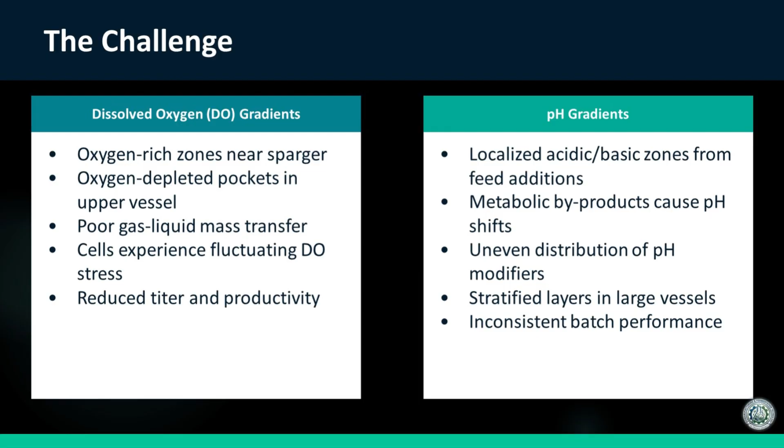You spent months in the lab. You have this absolutely perfect process. Your little 2-liter glass vessel is just humming. The cells are happy. The titer, the amount of product you're making, is just through the roof. Popping the champagne? Exactly, you pop the champagne. You tell management, hey, we are ready. And then you move to the manufacturing floor. You dump that beautiful process into a 5,000 or 10,000 liter tank, and suddenly the biology just revolts.

Productivity drops, the yield is completely all over the place, and you're just left standing there trying to explain why the sure thing isn't working anymore. It's the classic scale-up paradox. It really is the monster under the bed for fermentation scientists. And usually the explanation is just a shrug and a sigh that basically says, well, physics is hard. Which, to be fair, physics is hard.

Very hard. But today we're diving into a stack of sources that claim we don't actually have to just accept this as some law of nature. We are looking at a really specific solution kit. And it's designed to be fast, right? Super fast, designed to be implemented in a sprint, literally 7 to 10 days to fix this. Which is wild, because 7 days in this industry, you blink and a week goes by. Usually process changes take months.

Right, totally. So the mission here is really specific. It's eliminating gradients. We're talking about dissolved oxygen, DO, and pH, the big two. The goal is total homogeneity, making sure that the cell at the very bottom of a 2-story tall tank is experiencing the exact same spa day as the cell at the very top. Which really is the holy grail, because when you're dealing with 10,000 liters of fluid, you're dealing with massive hydrostatic pressure. You've got slow mixing times, gas transfer issues. It is definitely not just a bigger beaker.

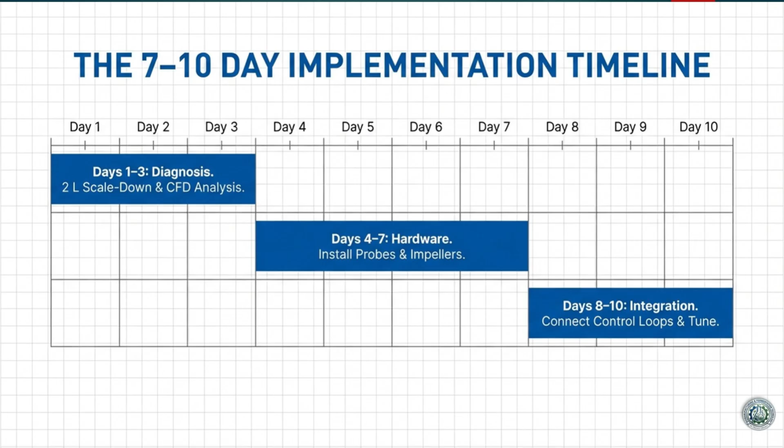This is where we close the loop. The hardware gives you the potential for homogeneity, but the software ensures you actually maintain it. And the sources detail two specific strategies here: DO-stat exponential feed and pH cascade control. Let's take those one by one.

Sure. DO-stat exponential feed. That sounds a little complicated. It's actually quite elegant once you see it in action. In a fed-batch culture, you're constantly feeding the cells glucose or some nutrient source over time. Usually you just follow a preset recipe: feed X amount at hour Y.

But biology doesn't always read the recipe book. Exactly. Sometimes the cells grow faster, sometimes slower. DO-stat control actually listens to the oxygen levels. It exploits the fact that eating requires breathing. Okay, walk me through how that works practically. When cells consume a nutrient, they have to consume oxygen to burn it.

If the DO level in the tank starts to suddenly rise, it means the cells have stopped eating, because they've run out of food and stopped breathing as hard. Exactly. So the system sees the DO go up and basically thinks, dinner time. And it automatically triggers a feed.

Yes, but it's not just a simple on-off switch. It uses an exponential algorithm to match the specific growth rate of the cells. It aims to keep the cells in a constant, happy metabolic state. So instead of just force-feeding them on a schedule, the tank is responding to their actual appetite in real time. Precisely, it stabilizes the metabolism.

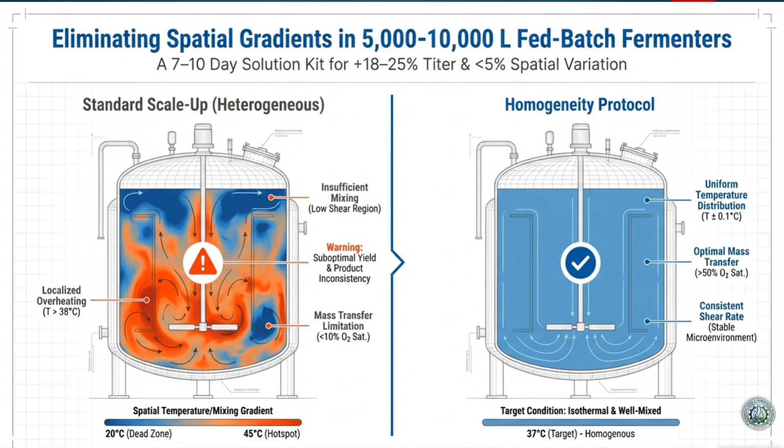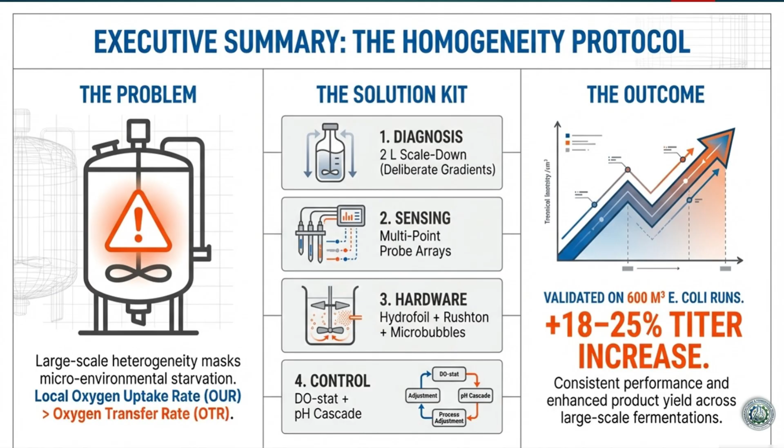It cascades the decision. It might actually just adjust the mixing speed momentarily to blend that acid spike away, instead of just dumping in more chemical base. Exactly, because if it dumped base based on the bottom probe, it might fix the bottom but make the top way too alkaline. It verifies the action against the mixing time to ensure it doesn't overshoot. It acts locally to fix global problems.

It turns the whole system from something static into something truly dynamic, actively fighting the formation of these microenvironments. But again, the sources do warn about tuning.

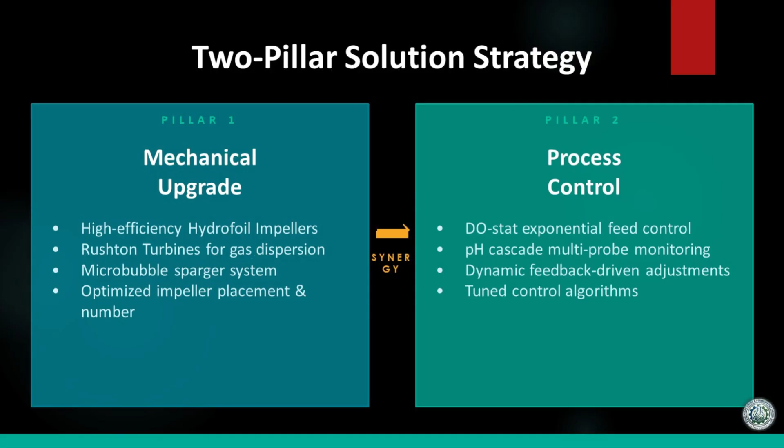Tuning the software, the PID loops: proportional, integral, derivative. You have to perfectly tune the gain, the deadband, and the response time. If you get the parameters wrong, the system can oscillate, like a yo-yo effect.

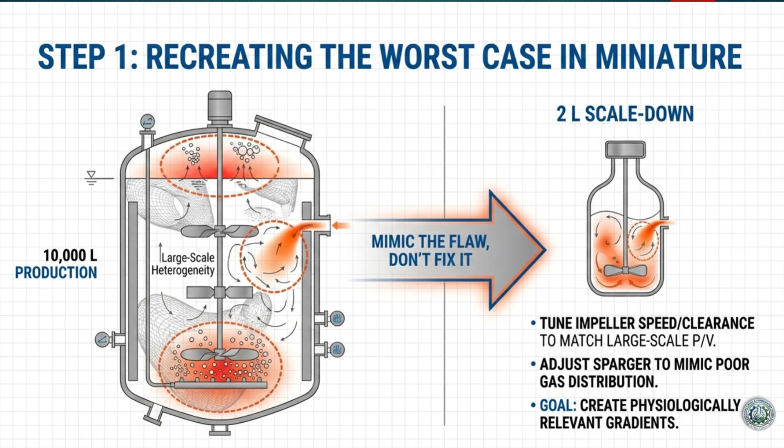The pH drops a tiny bit, the system panics and dumps base, then the pH shoots up too high, so the system dumps acid. The controller basically freaks out, and that is so much worse than doing nothing at all, because you are heavily stressing the cells with these constant violent swings.

So you really need to know what you're doing. This isn't just a plug-and-play app, it requires deep expertise. But when it works, you have a tank that is essentially self-correcting.

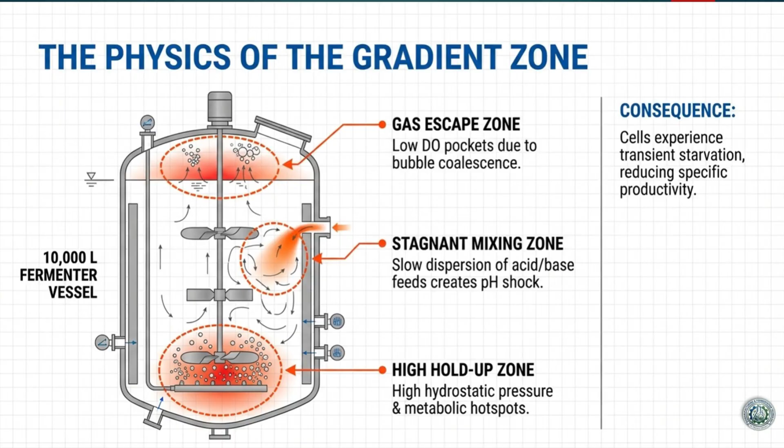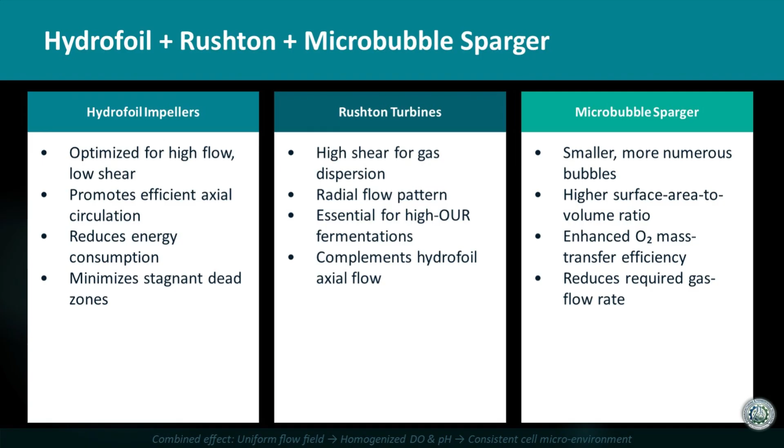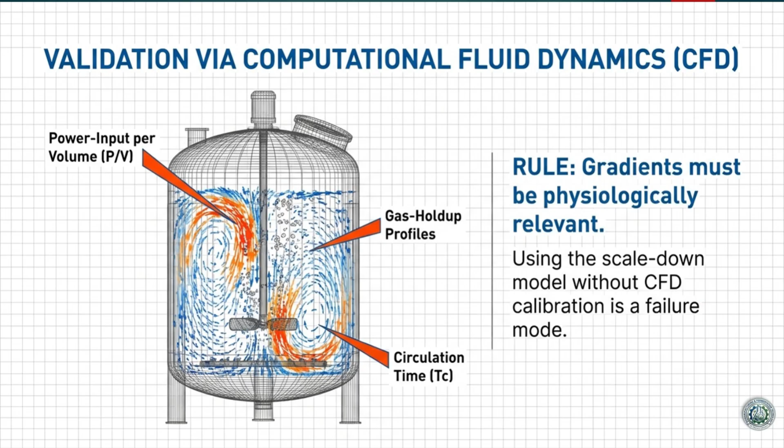And finally, you implement the smart control loops to keep it all stable. It is a complete workflow: model the flaw, see the flaw, mechanically fix the flow, and regulate the stability.

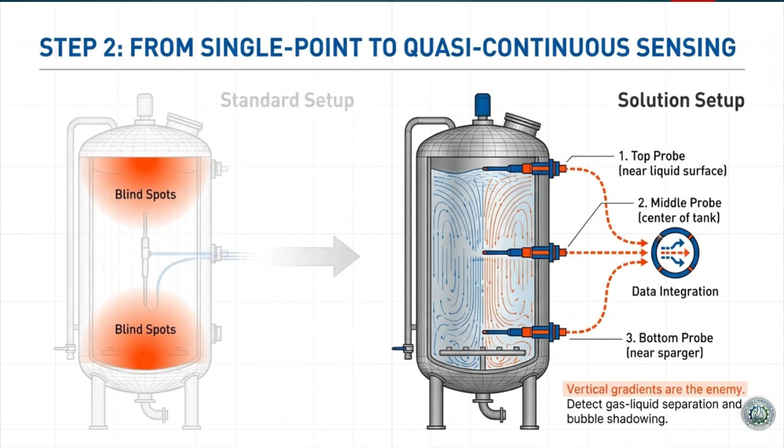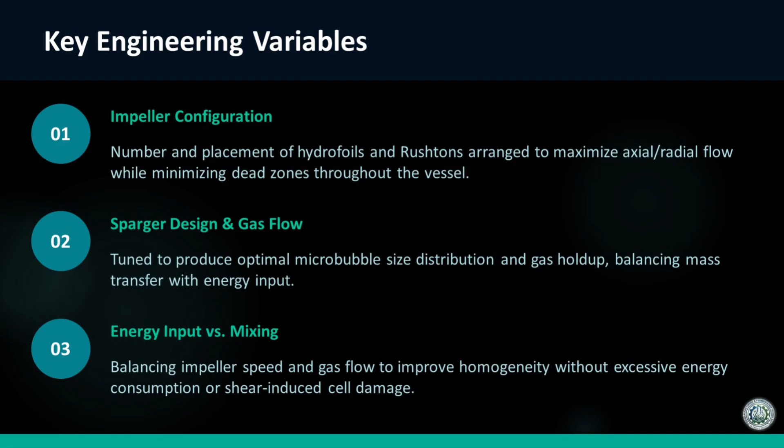And the end result for the listener, why should they care about doing all of this intensive work? Why not just accept the scale-up paradox like we always have? Because uniformity equals robustness. If you have gradients, you effectively have 3 or 4 entirely different fermentations happening inside the exact same tank. Some cells are perfectly happy, some are starving, some are suffocating.

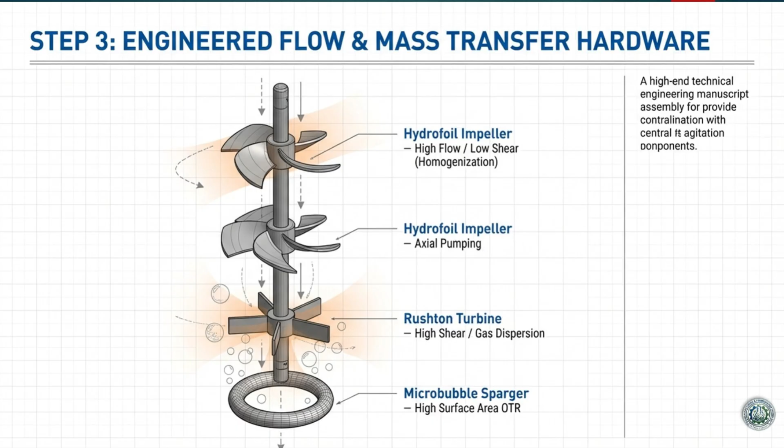And those unhappy ones aren't just lazy, they're active sabotage agents. Stressed cells often lyse, meaning they pop open. And when they pop, they release proteases, enzymes that literally chew up proteins. So the dying cells are actively destroying the valuable product that the living cells just made.

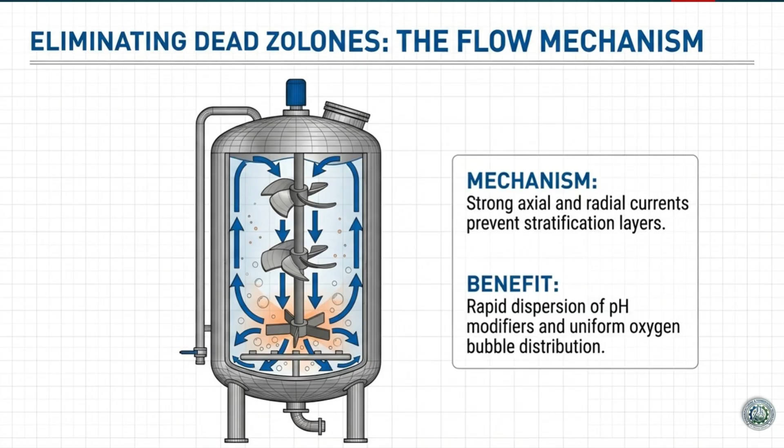That's a wildly vivid image. So by eliminating the gradients, every single cell becomes a productive, protected worker. And that is exactly where that 18 to 25% titer increase comes from in the E. coli case study. It's not magic, not at all. It's just ruthless efficiency.

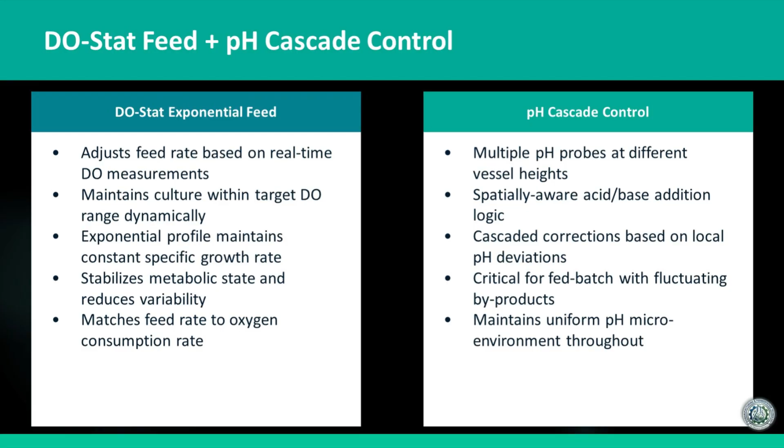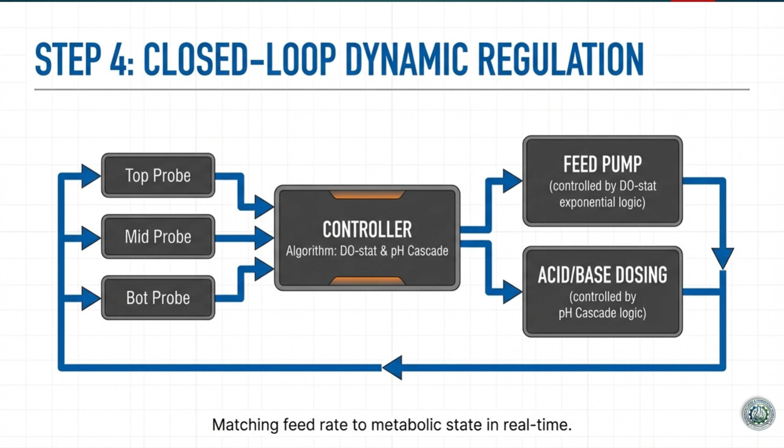And honestly, more importantly, it gives you reproducible batches. Less variation. You don't have to cross your fingers and just hope the mix works this time. You know it will, because you are actively controlling the microenvironment. It really takes the art out of fermentation and puts the rigorous engineering back in, which is exactly where it belongs in commercial manufacturing.

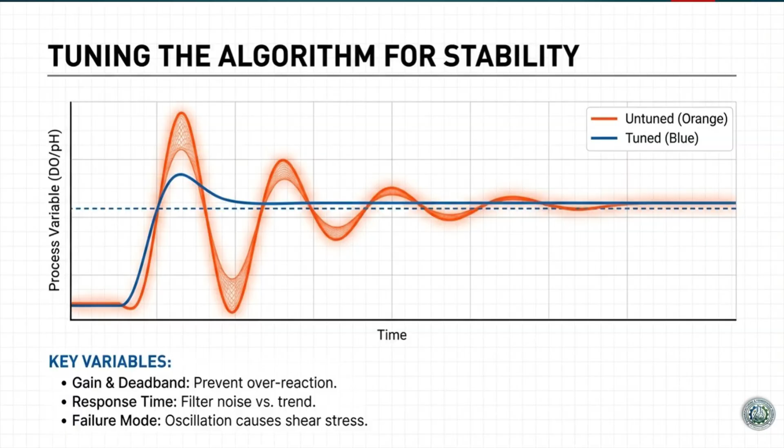Well, here's where it gets really interesting to me. If we can see and control these environments so precisely now, using the CFD, the spatial sensors, the smart loops, are we approaching a point where the scale-up effect just sort of disappears? Now that is the provocative thought.

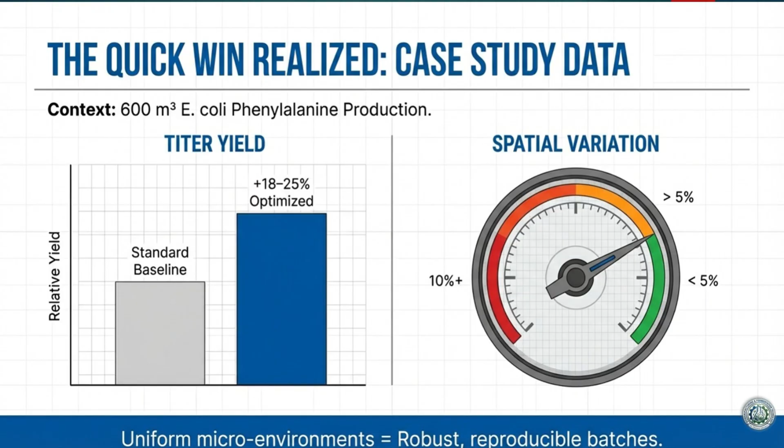For decades, we have just accepted that scale-up means loss, the biology tax. We literally build in safety margins, assuming we will lose 20% of our productivity when we finally go to manufacturing. It's treated like a tax you just have to pay to physics.

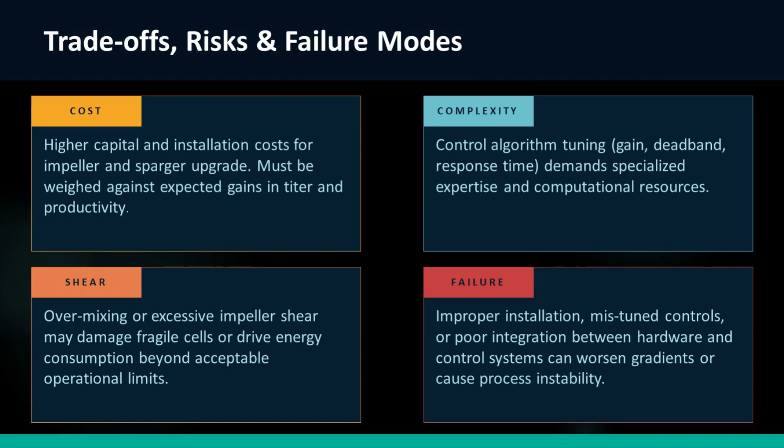But if we can truly, perfectly homogenize a 10,000-liter tank, if we can make it mathematically and physically identical to the 2-liter benchtop, then maybe the era of the scale-up factor is ending. Maybe very soon, what you see in the lab is exactly what you get in the plant, every single time, a world where the biology honestly doesn't even know how big the tank is.

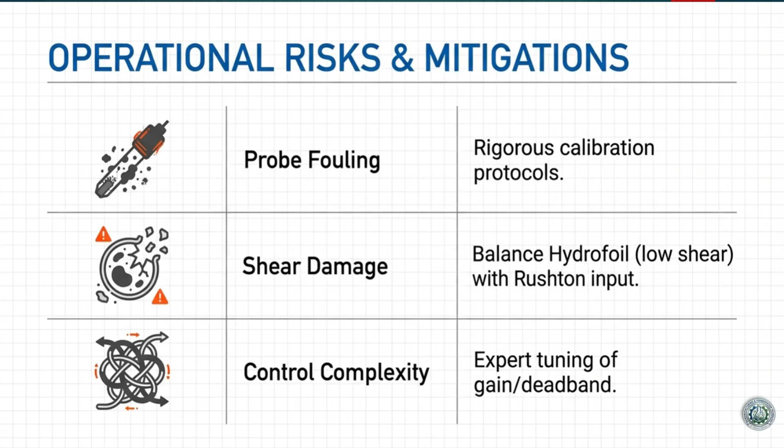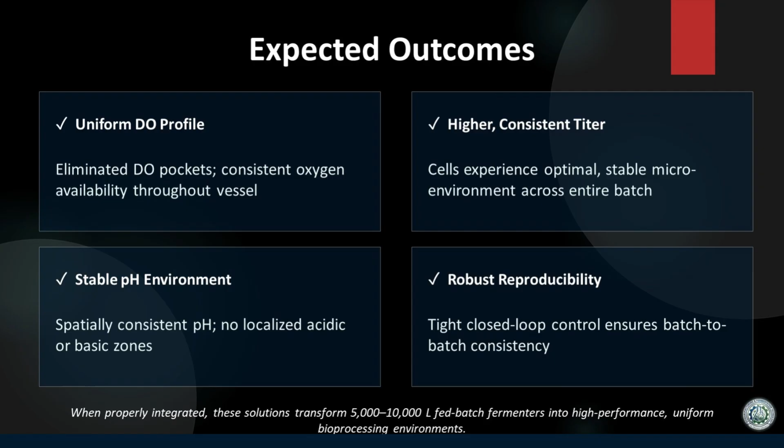It would change the economics of absolutely everything from life-saving pharmaceuticals to industrial enzymes. It would be a total paradigm shift. We aren't quite there yet, for everyone it takes a lot of work, capital, and expertise. But this specific solution kit is a massive, massive step in that exact direction.